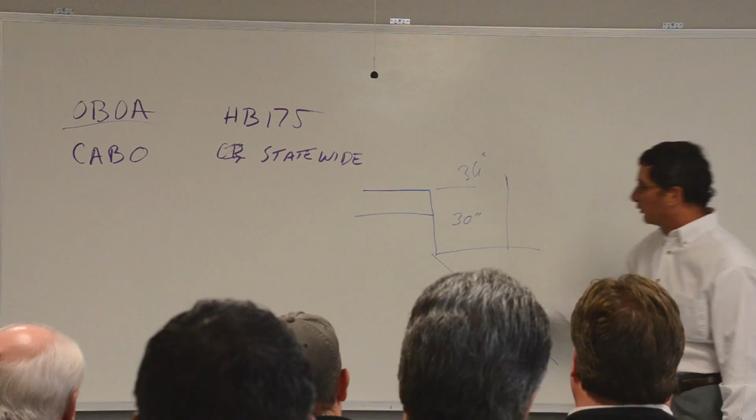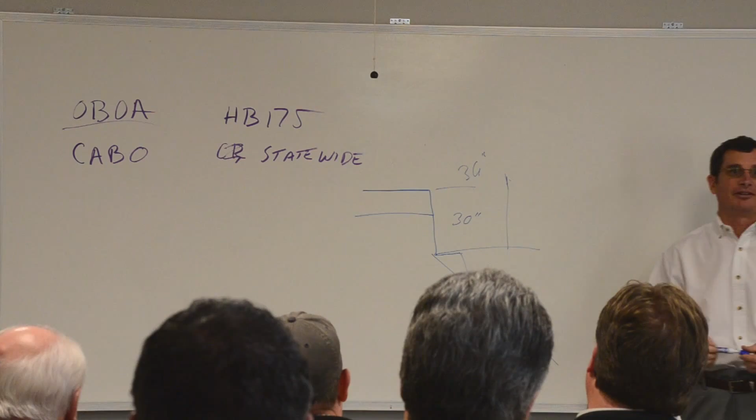One quick thing in 308.4, hazardous locations. If you got a deck sticking out and you've got ground, I think it's 30 inches, that you don't have to have a handrail. But now they've changed it so that 30 inches has to be measured 36 inches away from the deck. So if you built a little flower bed there and then it went like this, you didn't have to do anything before. So you go 36 inches out and measure to what your ground level is. They were afraid people were building them and putting a little flower bed there and saying, well, it's only 30 inches, and getting by with it.

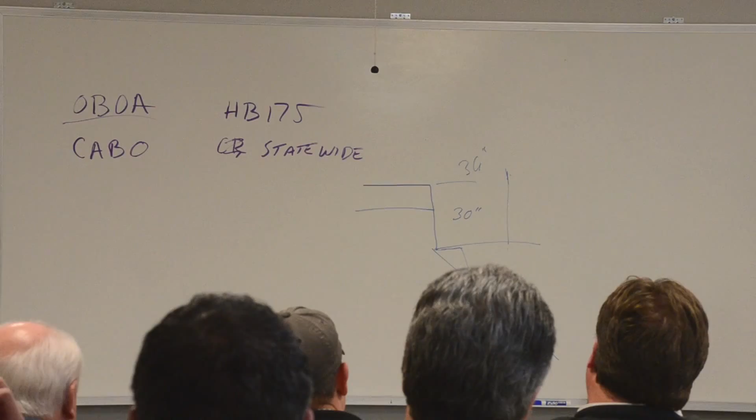Another part, more for remodeling, is in section 310 on emergency escape and rescue openings. If you do remodeling, if you change windows, it specifically states that you don't have to make the windows meet the egress requirements that are for new construction, where you have to have the windows so wide and so tall and so many square feet.

Section 311, means of egress. You aren't going to find anything on the width of interior doors anymore — this was an Ohio legacy type of thing. We used to have a minimum 2'4" door for a bathroom. They had some different things in there, and I heard a lot of code officials crying over that, but how many people are putting that small of a door, or a 2-foot wide door opening, in bathrooms? Maybe there's guys out there still doing it, so.

Speaking of that, do we have any code officials here? If I speak badly, how many builders do we have? A lot of builders, remodelers, a couple remodelers, and I know there's some associates, I see some energy guys. So anybody that's not a builder or remodeler? I got a guy that sells me floor tile over there, so okay. We got a little bit of everybody here.

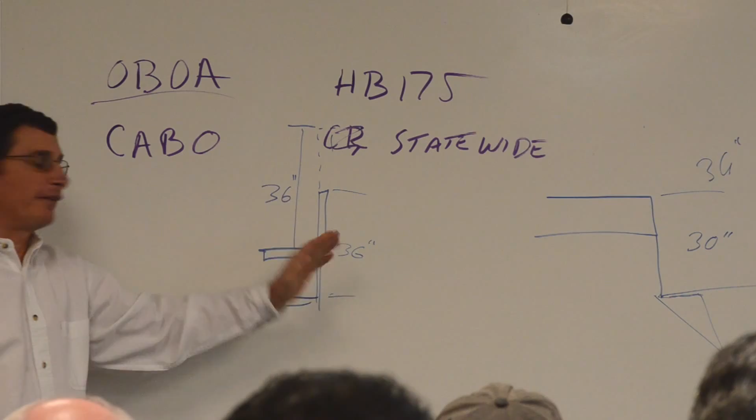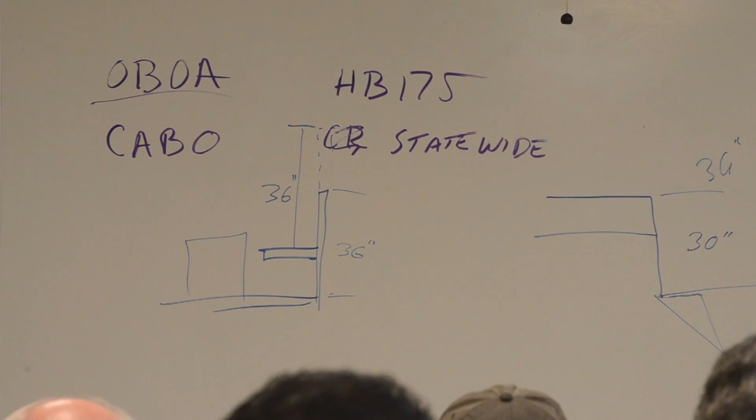One thing on guardrails, section 312, specifically 312.2: if you've got a deck with a railing, and one thing we always do is put a seat right there. Now this seat has to be accounted for, so your 36-inch height extends from the top of the seat, not from the deck. So if you put anything climbable up against that railing of the deck, the railing has to be increased. It doesn't say you can't put your seat 6 inches away from that railing and be good, because there's nothing in there that states that, but that's going to be one of those things where if you try to skirt the issue, it's going to be a little tricky. We had a couple of conversations about that years ago.

On smoke alarms, one thing that's changed a little bit now: if you have a whole house alarm system, they specifically mention you can use that as your fire protection for your smoke alarm system. But it has to meet the same requirements of the code, meaning you have to have an alarm or sensor in each bedroom and outside of each bedroom. You can't just put one per floor. You also have to work out some special details if the homeowners decide to unhook it or do anything like that. There's some reading and writing and more paperwork to do, but probably the easiest thing to do is just keep putting in dual systems and be done with it. But if you so choose, you can do something different.

Section 315, carbon monoxide alarms, that's brand new. It's been something they've been fighting with for 10 or 12 years. There's still a lot of discussion and controversy over exactly the best place to put it. There's nothing in the code that tells you where you have to put it, it just basically states that each home has to have one, or any home with either an attached garage or a fuel burning appliance in it is required to do it. It doesn't say it has to be electric with battery backup, it can be a plug-in model, as long as it's put in the way the manufacturer states, in the right location, you're okay.

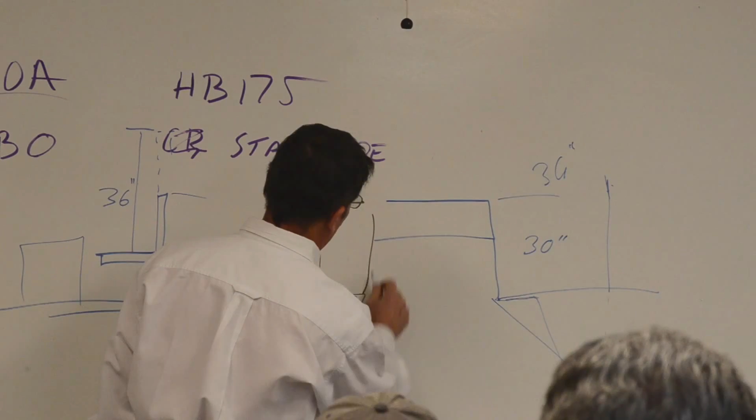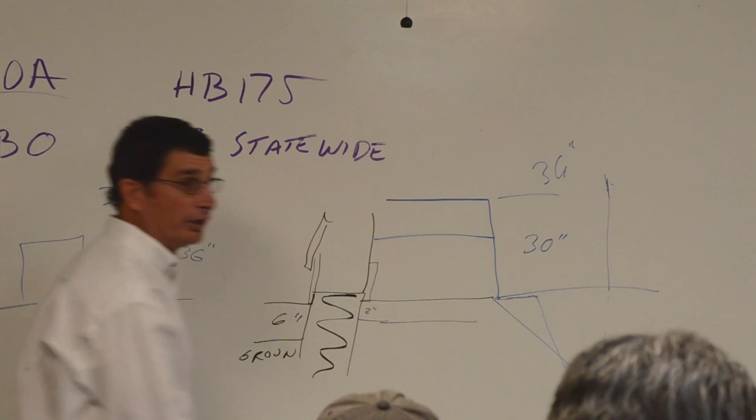If by chance you've got the same thing over here, you can't pour a concrete slab right up against that - there has to be a 2-inch space between there. So it might get you on front porches and those type of things.

There was a lot of discussion on this section, thinking this is new language, but most of this in section 317 has been in the code. Some of it was combined, kind of like the wood protection, when I mentioned fire separation and draft stopping - they combined some of the sections together. So it's just different looking, but it's the same language. It's been there for a while.

Section 319 - you now have to have your address in front of every job. That's a whole new section. It's 4 sentences, but basically you've got to have the job site address on there.

Storm shelters - there's a section in there on how to build a storm shelter. I would just advise you, the ICC has created standards called ICC NSSA-500, it's the ICC 500. It specifically tells you how to build a storm shelter.

What's concerned us is, if you build a room in a house and call it a safe room or whatever, and a lawyer gets a hold of you, and you didn't build it to any standard - you just say well I put concrete and steel rebar in there - somebody could come back and possibly litigate you. You just have to be careful of what you call some of these rooms.

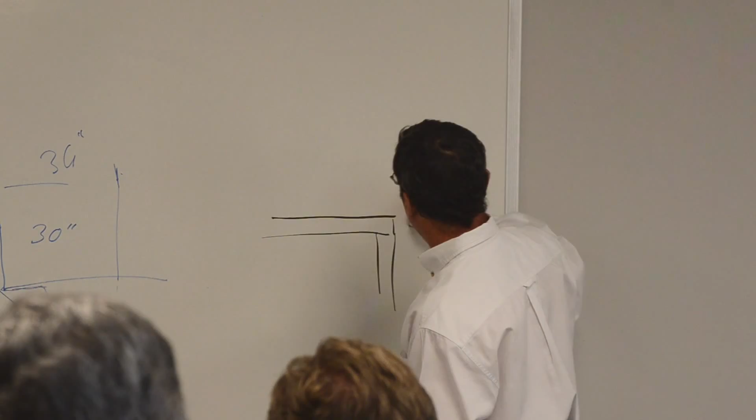Chapter 8 - most of the major changes have happened before chapter 6, but chapter 8 covers attic access. This is one of those chapters where there's little things like this that you don't think much of, but it can jump out at you. If you've got an attic access in your house, there's your ceiling joist, your outside wall, and you've got a roof, and you put an attic access in to get up. There's now a requirement for that dimension, that it can't get too small.

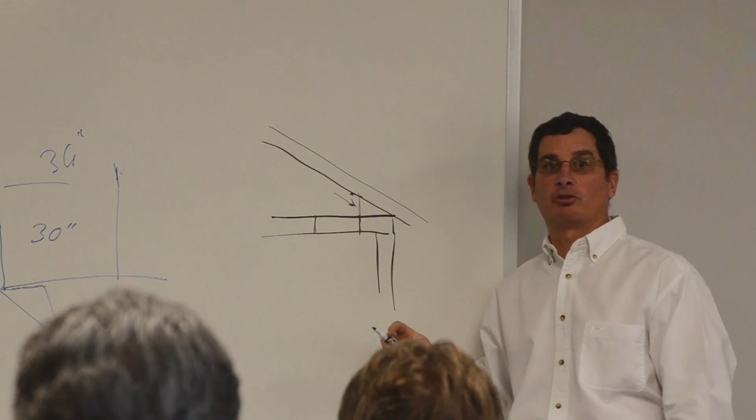It's 30 inches. So you can't just put it in an outside closet or something like that possibly, depending on your roof pitch and different things like that. But there's sometimes just little things like that can come back and get you a little bit. Try to get some of them, but there may be more of them in there that you just kind of see, or once again, it's stuff that's always been in there that nobody really saw or looked at before.

Flashing is one thing that is now written in the code much more, I guess prescriptive, or it's just labeled in there now. They actually have what they call sidewall flashing, which we sometimes refer to as kick-out flashing. If you've got like a dormer sticking out of a house, you have to actually have that flashing that goes up the side of the dormer, kicking out away from the construction, so it forces water away from the house.

More specific, you're going to see per manufacturer's specs. You're just going to start to see more details on how to keep water away from the house. It's another type of the wind resistance, water resistance, moisture penetration - all kinds of different issues that they've slowly incorporated into the code, because now the houses are getting tighter.